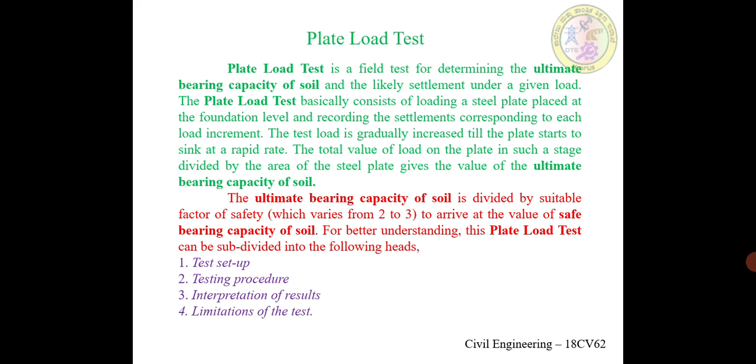So let us understand this plate load test by knowing the various stages which will be followed while conducting the plate load test. This is divided into 4 different heads. The first one is the test setup, then we have the testing procedure, then we have to interpret the results, and finally let us know the limitations of the test. First, we will go for understanding the test setup.

A test pit is usually dug at a site up to a depth at which the foundation is proposed to be laid. The width of the pit should be at least 5 times the width of the test plate. At the center of the pit, a small square depression or a hole is made whose size is equal to the size of the test plate and the bottom level of which corresponds to the level of the actual foundation. The depth of the hole should be such that the ratio of the depth to width of the loaded area is approximately the same as the ratio of the actual depth to width of the foundation.

A mild steel plate, which is also called a bearing plate, is generally used in this test, and its thickness should not be less than 25 mm, and its size may vary from 300 to 750 mm. The plate could be square or circular in shape. Usually a square plate is used for all different shapes of footing except the circular footing, wherein a circular plate is used.

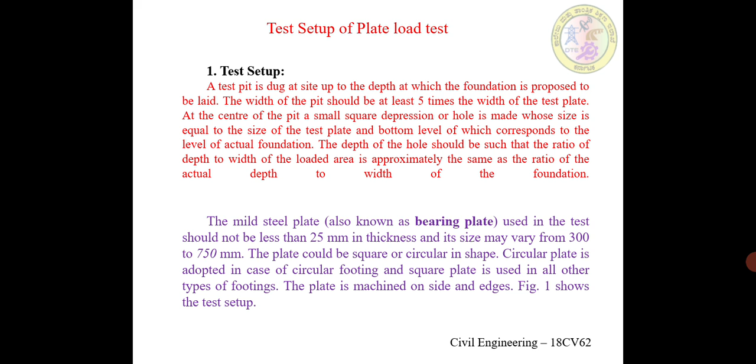Coming to the testing procedure, the load is applied to the test plate through a centrally placed column. The test load is transmitted to the column by the following method, that is the gravity loading method, which is also called the reaction loading method. In case of the gravity loading method, a loading platform is constructed over the column placed on the test plate, and the test load is applied by placing dead weight in the form of sandbags, pig iron blocks, concrete blocks, lead bars, etc.

on the platform, and we will generally use a hydraulic jack to transfer the load from the platform to the bearing plate. The reaction of the hydraulic jack is borne by the loaded platform, and this form of loading we call reaction loading. So this figure 1 will show you the plate load test arrangement to determine the settlement against the load.

So now I will continue with the testing procedure. When loading is applied to the test plate, it sinks or settles. The settlement of the plate is measured with the help of sensitive dial gauges. For the square plate, generally 2 dial gauges are used for more accuracy. The dial gauges are mounted on an independently supported datum bar.

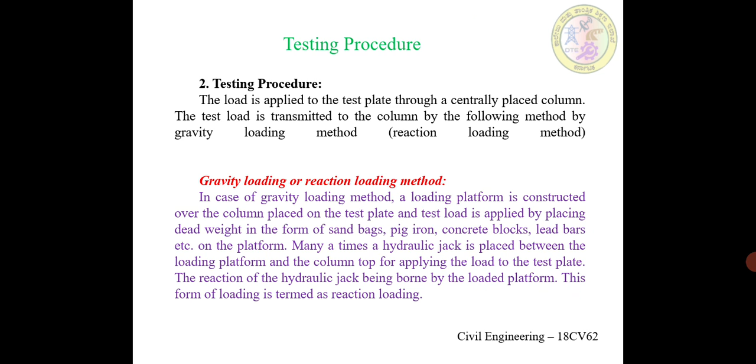The settlement will then be recorded at 1, 5, 10, 20, 40, 60 minutes and further after an interval of 1 hour for clayey soils. These hourly observations are continued until the rate of settlement is less than 0.2 mm per hour. The test is conducted until failure or at least until a settlement of about 25 mm has occurred.

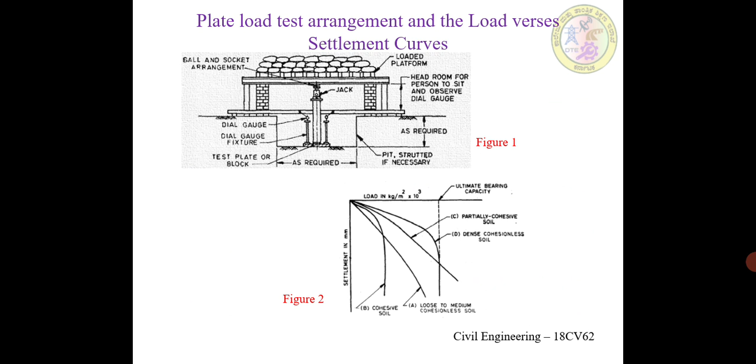Figure 2 shows the graph of load versus settlement, and we have 4 different kinds of soils A, B, C, D, and accordingly we can interpret those curves based on the results. Curve 1 is typical for loose to medium non-cohesive soils. It can be seen that initially this curve is a straight line, but as the load increases it flattens out. There is no clear point of shear failure, and this is shown as curve A.

Curve 2 is typically meant for cohesive soils. This may not be quite straight in the initial stages and leans towards the settlement axis as the settlement increases, as shown in the load versus settlement curve as curve B. Curve 3 is typically for partially cohesive soils and is shown as curve C. Curve 4 is typical for purely dense non-cohesive soil.

From these 4 different kinds of curves, we can say that the safe bearing capacity is obtained by dividing the ultimate bearing capacity by a factor of safety, which varies from 2 to 3. The value of the safe bearing capacity thus arrived at is considered to be based on the criteria of shear failure. Safe bearing capacity can also be based on permissible settlement.

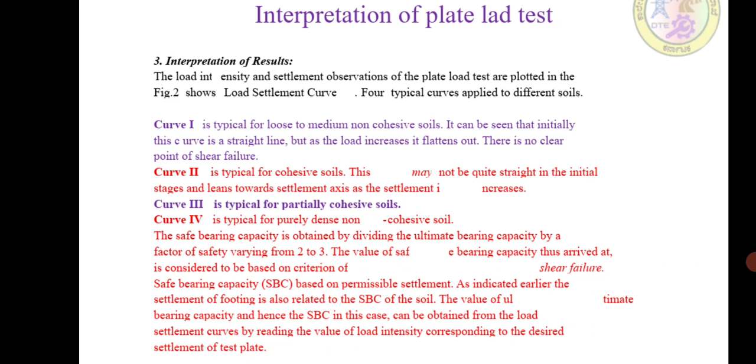As indicated earlier, the settlement of footing is also related to the SBC of the soil. The value of ultimate bearing capacity and hence the SBC in this case can be obtained from the load settlement curves by reading the value of load intensity corresponding to the desired settlement of the test plate.

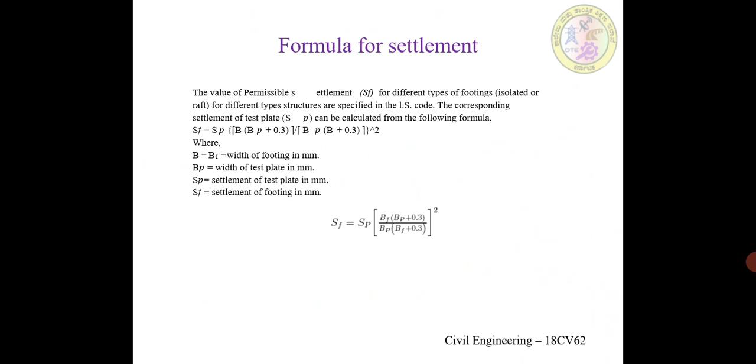The settlement of the footing SF is given by the formula SF = SP × [BF (BP + 0.3) / (BP (BF + 0.3))]², wherein BF is the width or breadth of the footing, BP is the width of the test plate in mm, and SP is the settlement of the test plate in mm. Using this equation, we can calculate the settlement of the footing. This test also has some limitations.

So let us discuss the limitations of the plate load test. I have mentioned here 3 different limitations. The first one is that the test results reflect only the character of the soil located within a depth of less than twice the width of the bearing plate. Normally, the foundations are larger than the test plates. The settlement and resistance of the soil against shear failure will depend on the properties of a much thicker stratum. Thus, the results of the test could be misleading if the character of the soil changes at shallow depths.

The second limitation is that the plate load test, being of short duration, does not give the ultimate settlements, particularly in the case of cohesive soils. For clayey soils, the bearing capacity for a large foundation is almost the same as that for the small test plate, but in dense sandy soils, the bearing capacity increases with the size of the foundation, and hence the test with smaller size test plates tends to give conservative values in dense sandy soils.

In view of the above limitations, the plate load test method of determining the SBC of soil may be considered adequate for light or less important structures under normal conditions. However, in the case of unusual types of soil stratum and for all heavy and important structures, relevant laboratory tests or field tests are essential to establish the SBC of the soil.